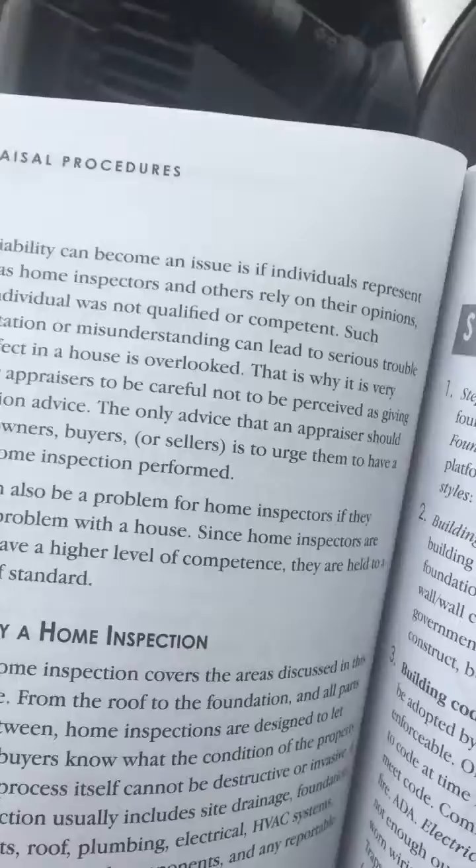Basic appraisal procedures, page 212.

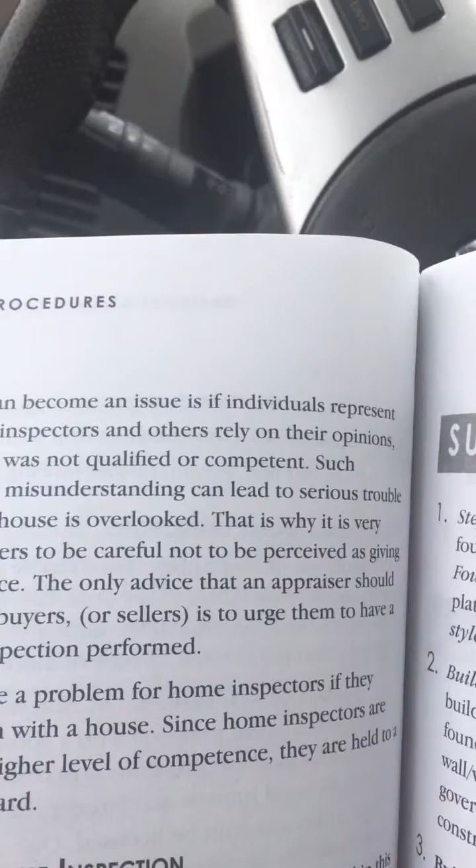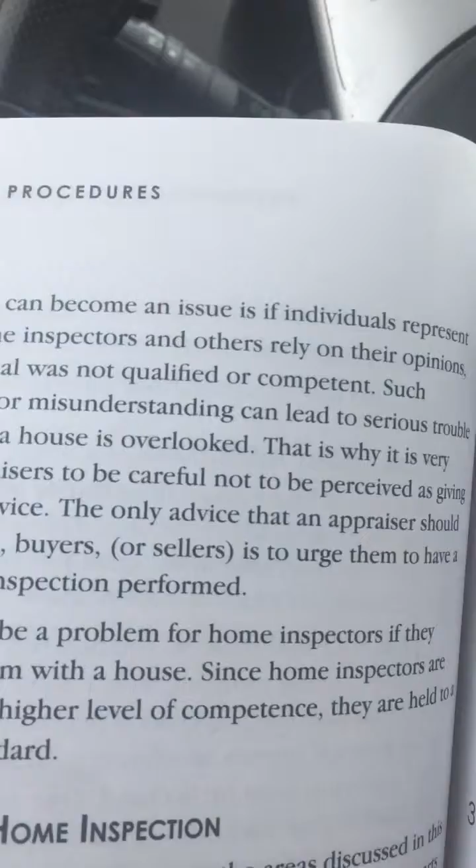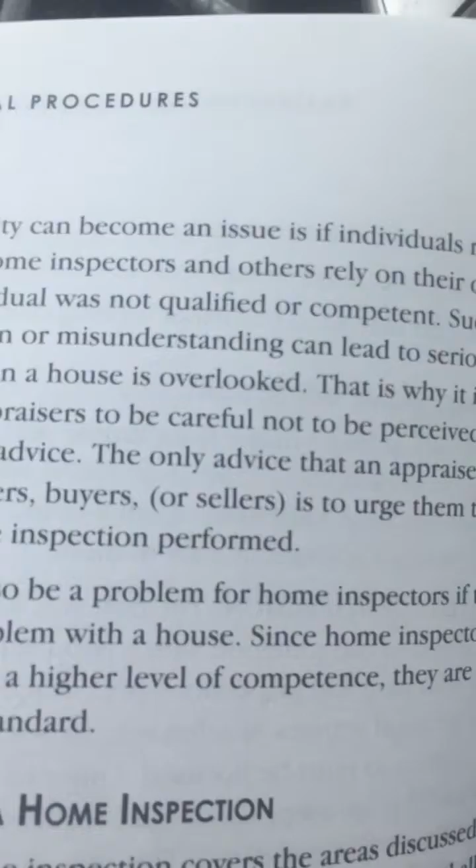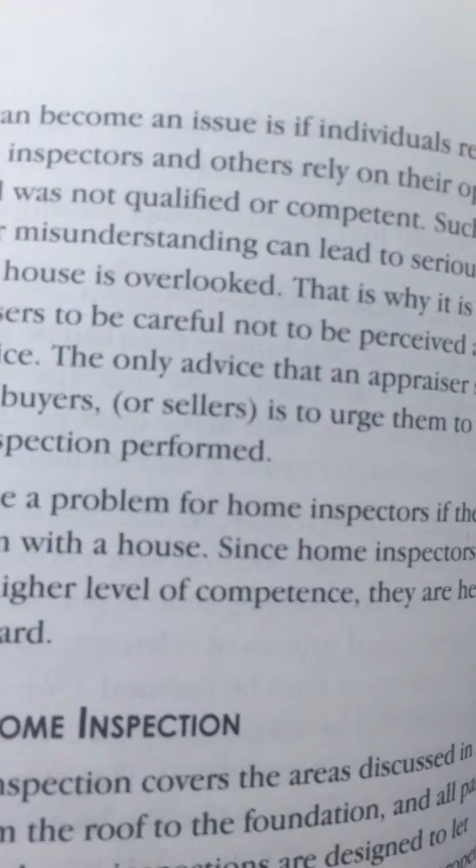Liability can become an issue for individuals who represent themselves as home inspectors when others rely on their opinions, and that individual was not qualified or competent. Such misrepresentation or misunderstanding can lead to serious trouble if a major defect in a house is overlooked. That is why it is important for appraisers to be careful not to be perceived as giving home inspection advice. The only advice an appraiser should give to homeowners, buyers, or sellers is to urge them to have a professional home inspection performed.

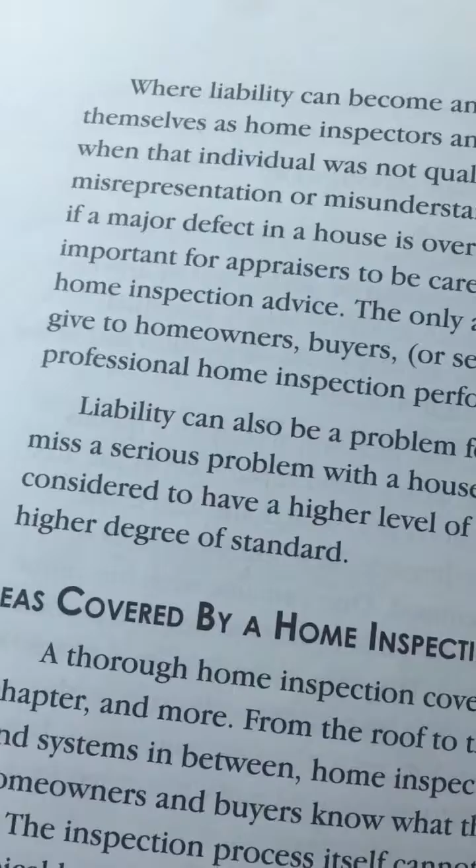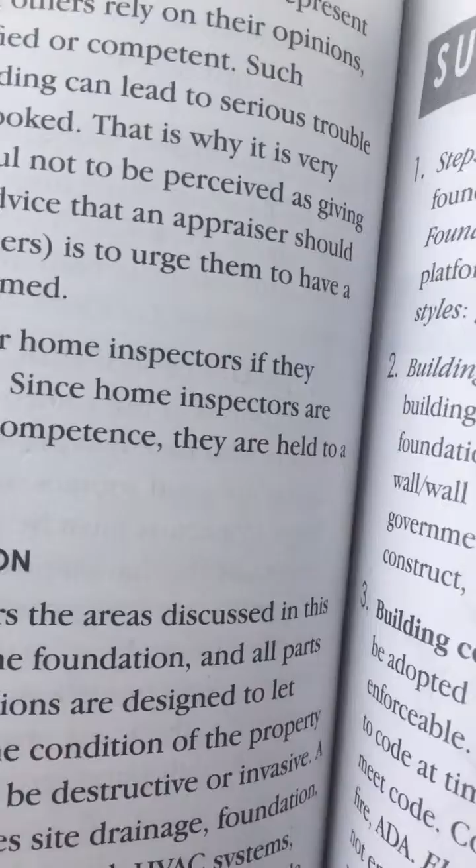Liability can be a problem for home inspectors if they miss a serious problem with the house. Since home inspectors are considered to have a higher level of competence, they are held to a higher standard. Areas covered by a home inspection.

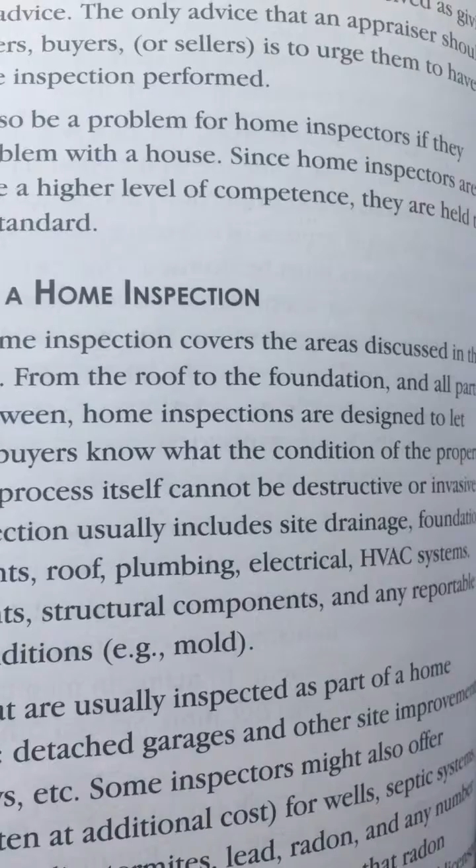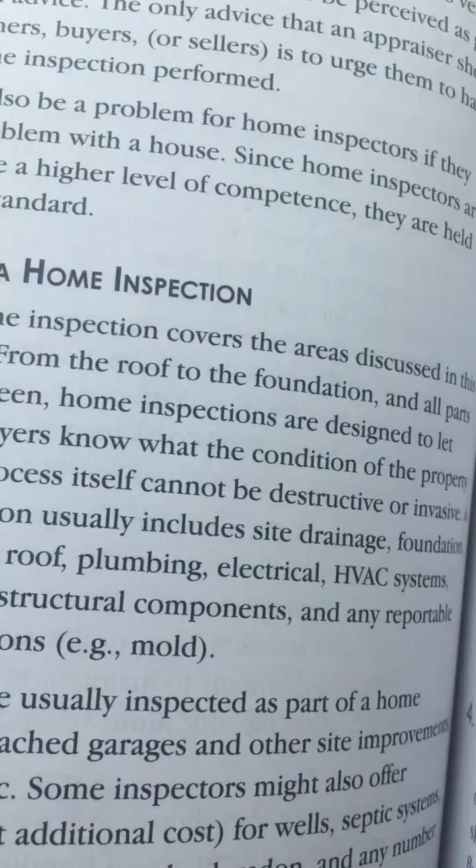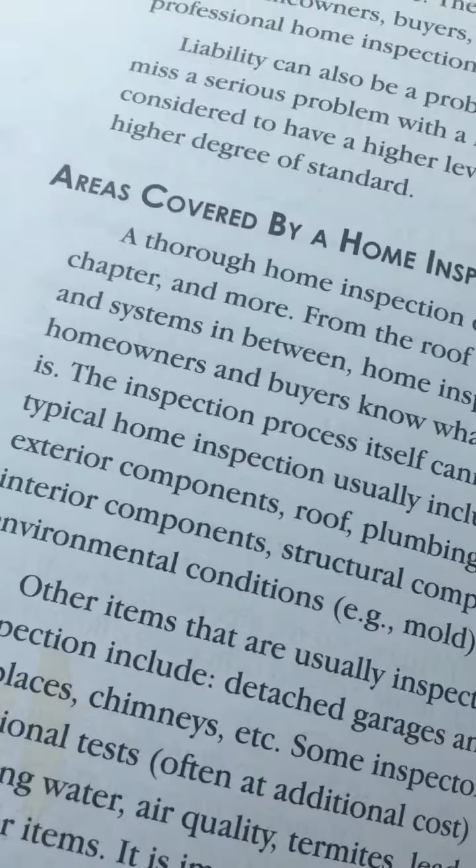A thorough home inspection covers the areas discussed in this chapter and more, from the roof to the foundation, and all parts and systems in between. Home inspections are designed to let homeowners and buyers know what the condition of the property is. The inspection process itself cannot be destructive or invasive.

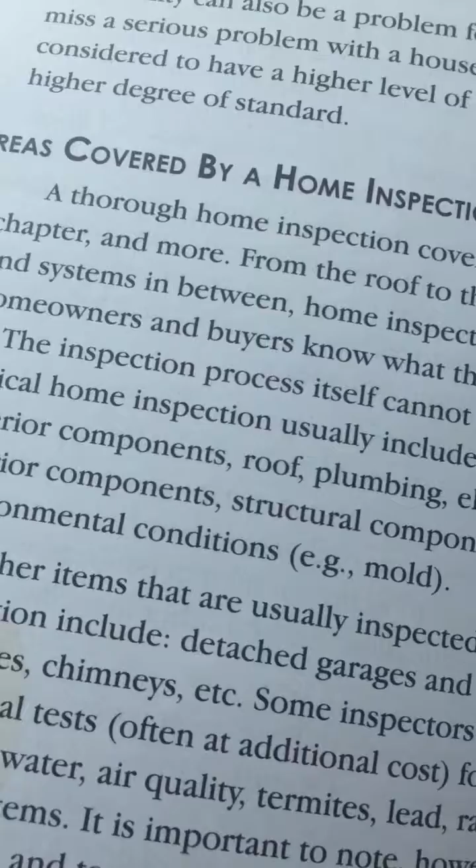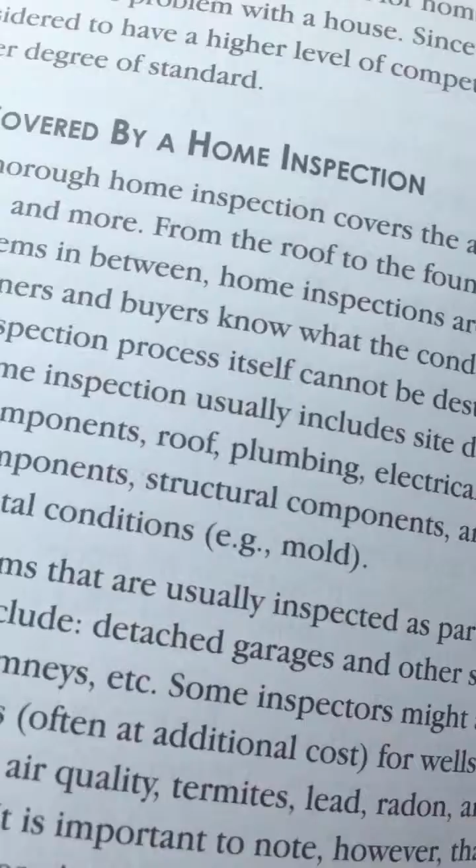A typical home inspection usually includes site drainage, foundation, exterior components, roof, plumbing, electrical, HVAC systems, interior components, structural components, and any reportable environmental conditions, for instance, mold.

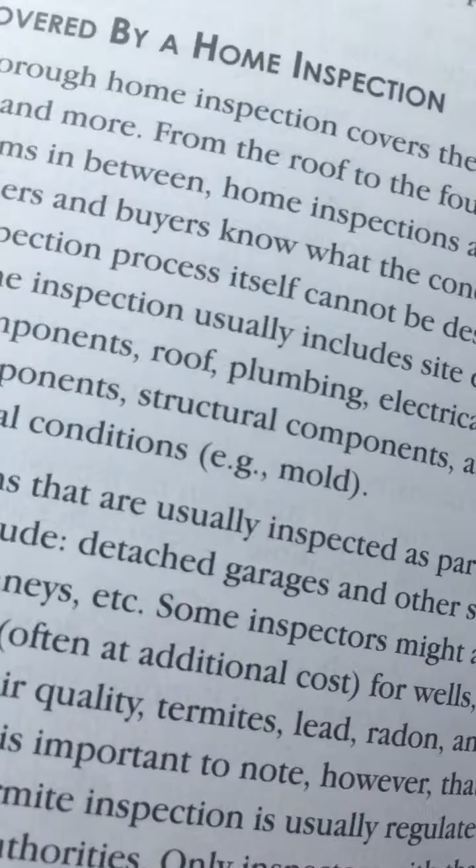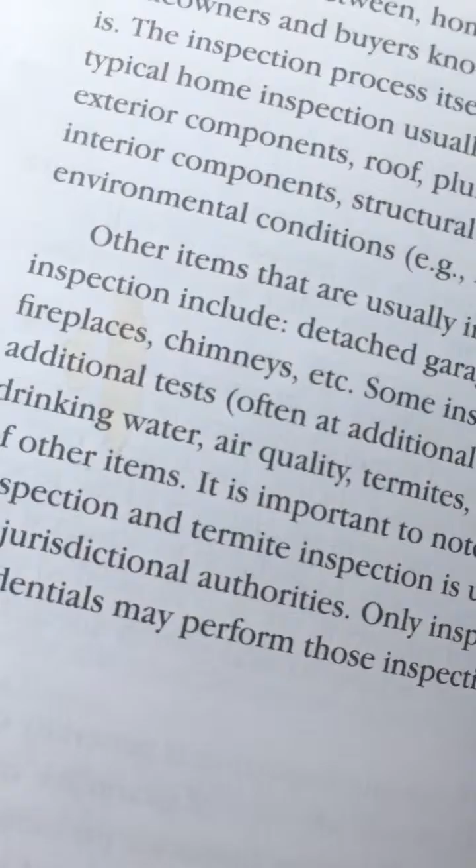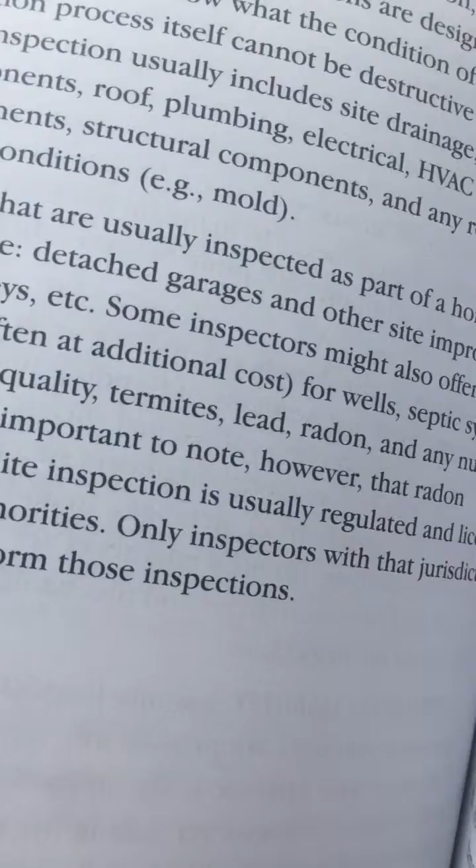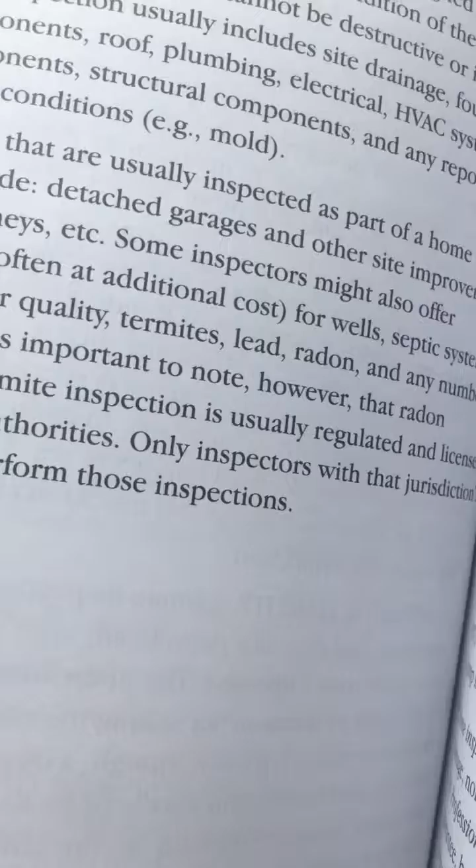Other items usually inspected as part of a home inspection include detached garages and other site improvements, fireplaces, chimneys, etc. Some inspectors might also offer additional tests, often at additional cost, for wells, septic systems, drinking water, air quality, termites, lead, radon, and any number of other items.

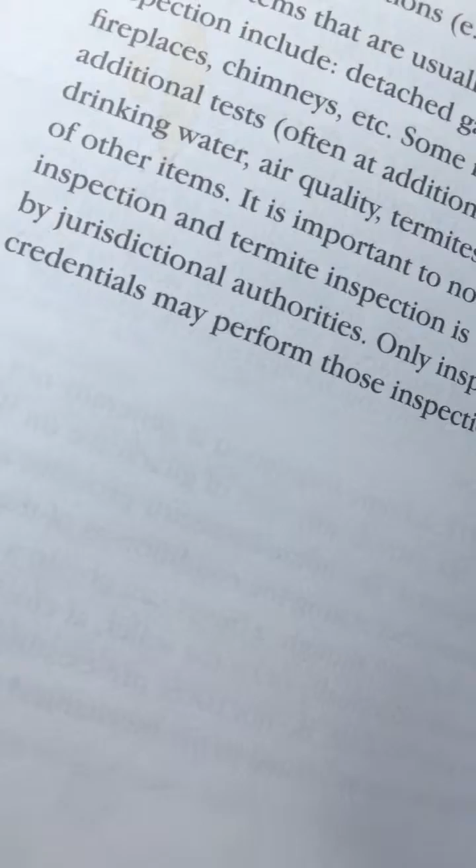It is important to note, however, that radon inspection and termite inspection are usually regulated and licensed by jurisdictional authorities. Only inspectors with that jurisdiction's credentials may perform those inspections.

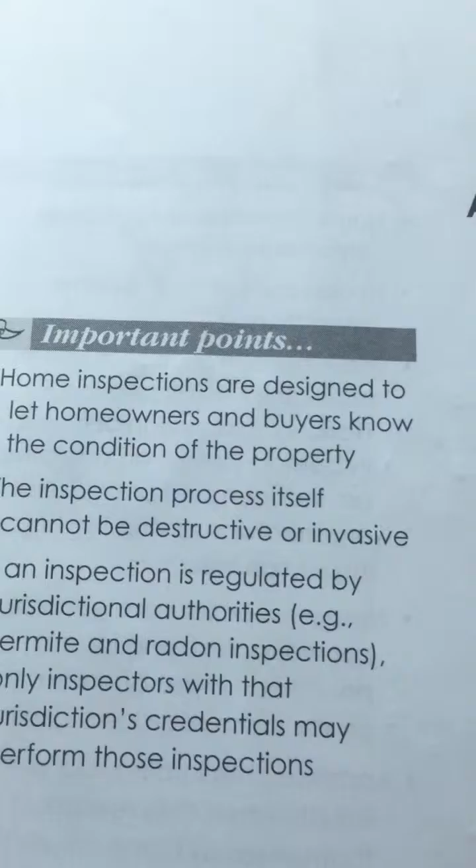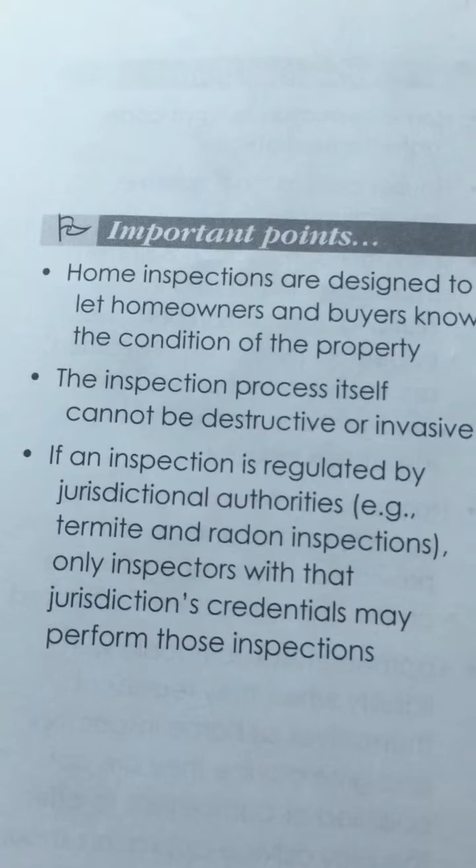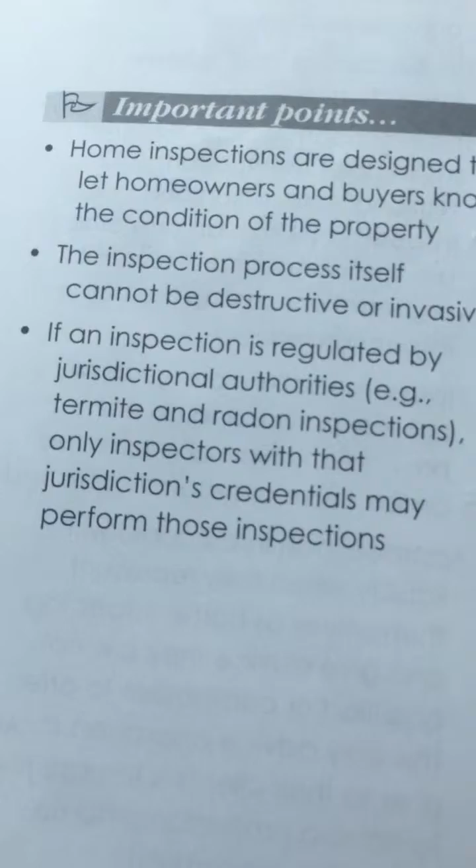Important points: Home inspections are designed to let homeowners and buyers know the condition of the property. The inspection process itself cannot be destructive or invasive. If an inspection is regulated by jurisdictional authorities, for instance, termite and radon inspections, only inspectors with that jurisdiction's credentials may perform those inspections.

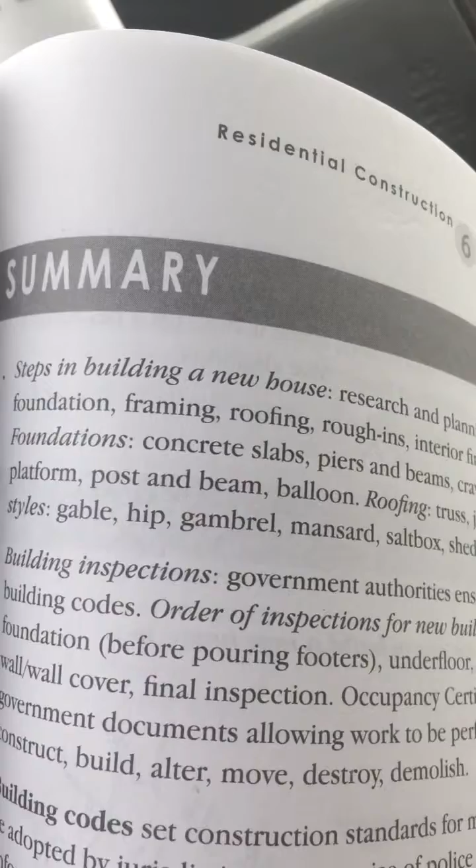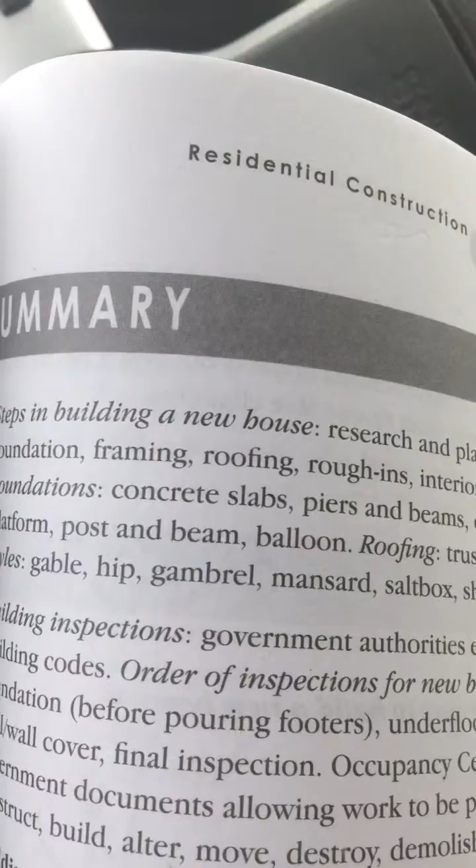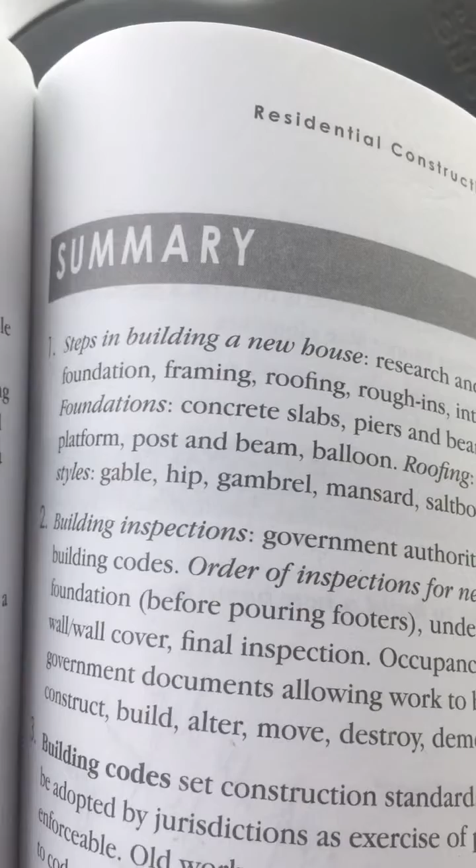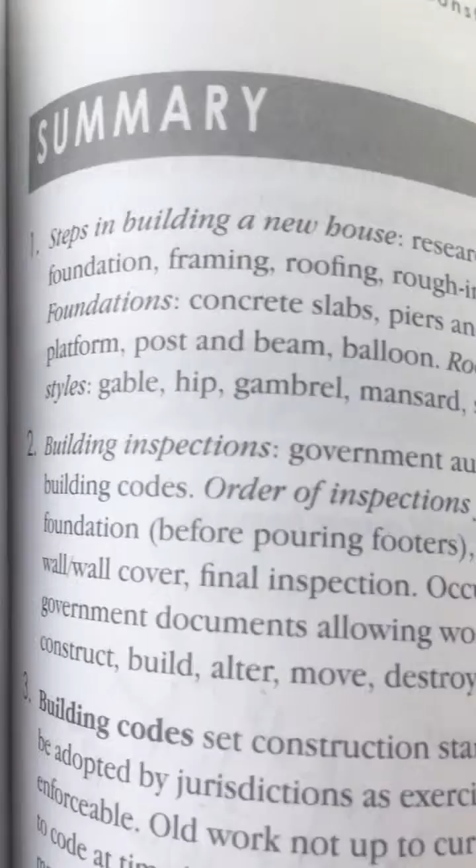Summary. Steps in building a new house: research and planning, pre-construction, site work, foundation, framing, roofing, rough-ins, interior finish, exterior finish, and completion. Foundations: concrete slabs, piers and beams, crawl spaces or basements. Framing: platform, post and beam, balloon. Roofing: truss, joist and rafters, sloped joist. Roof styles: gable, hip, gambrel, mansard, salt box, shed, flat.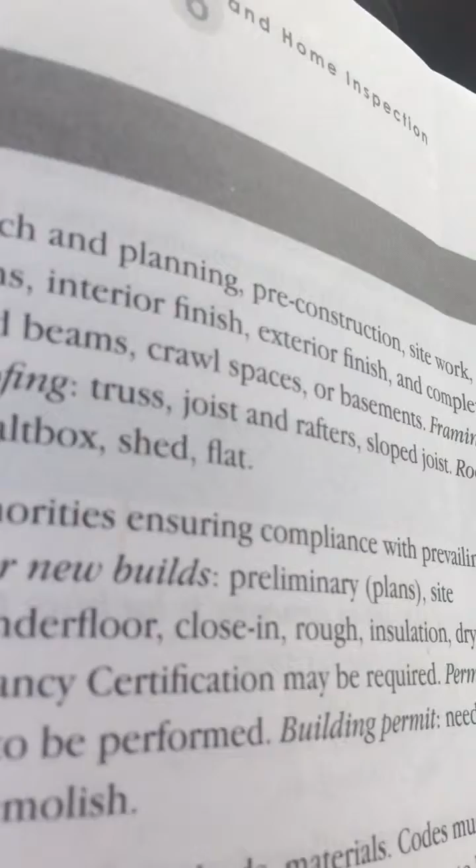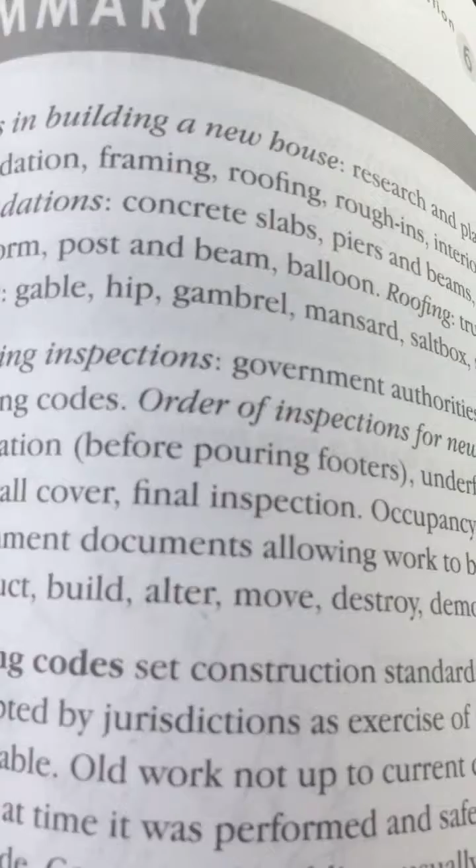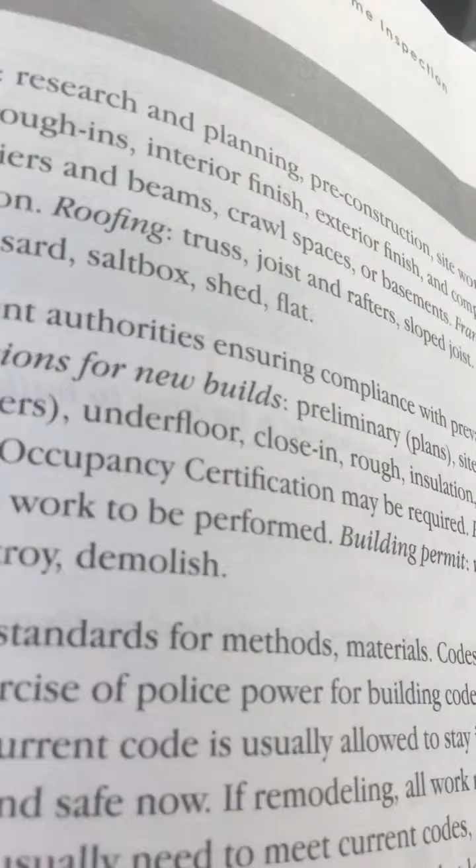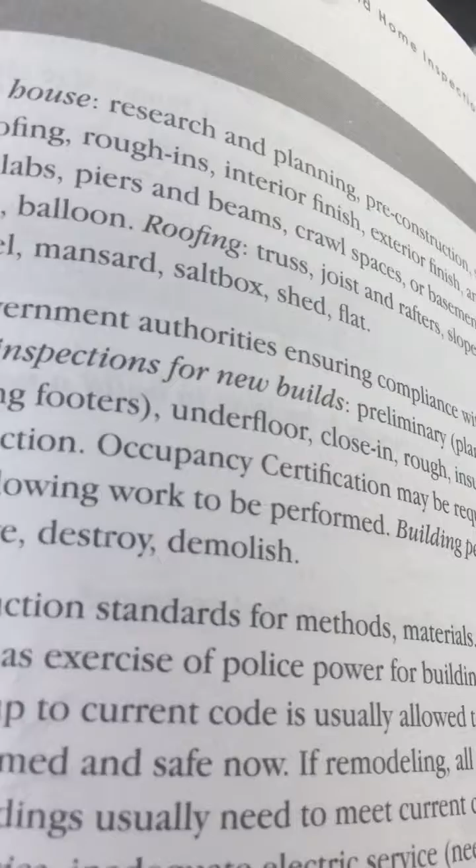Building inspections: government authorities ensuring compliance with prevailing building codes. Order of inspections for new builds: preliminary, plans, site foundation before pouring footers, underfloor, close in, rough, insulation, drywall, wall cover, final inspection. Occupancy certification may be required.

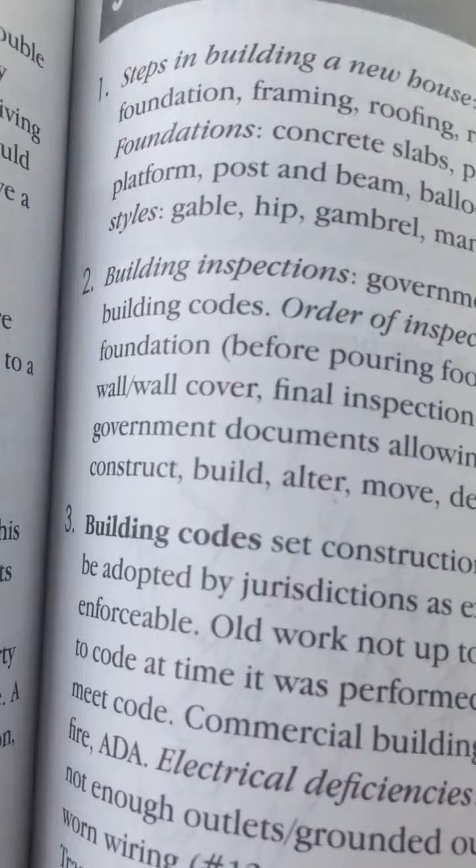Permits are government documents allowing work to be performed. A building permit is needed to construct, build, alter, move, destroy, or demolish.

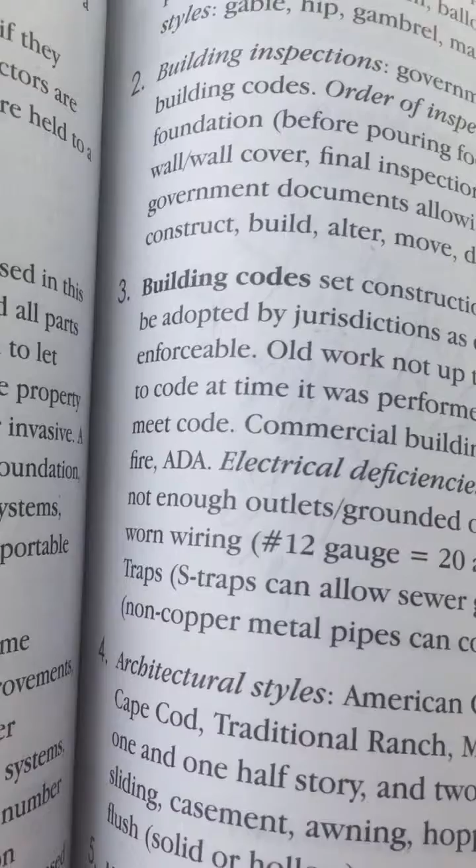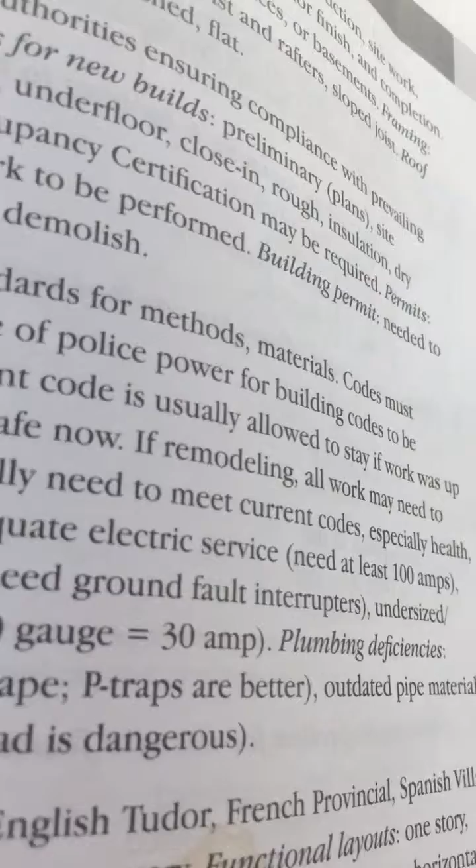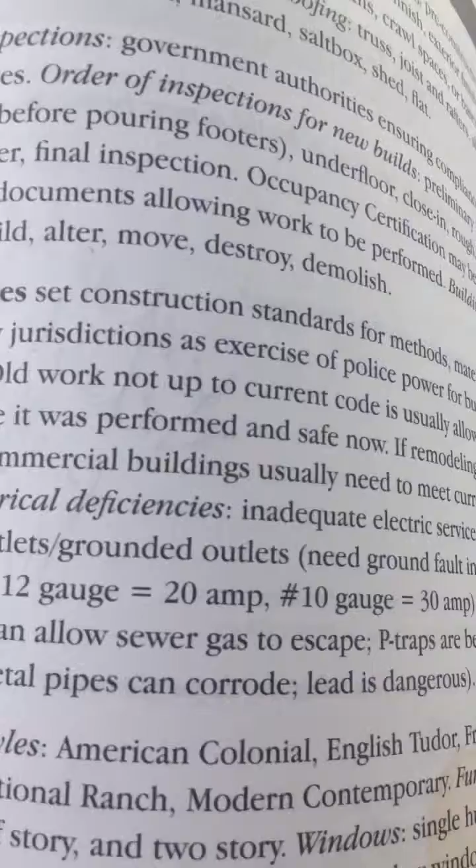Building codes set construction standards for methods and materials. Codes must be adopted by jurisdictions as an exercise of police power for building codes to be enforceable. Old work not up to current code is usually allowed to stay if the work was up to code at the time it was performed and is safe now.

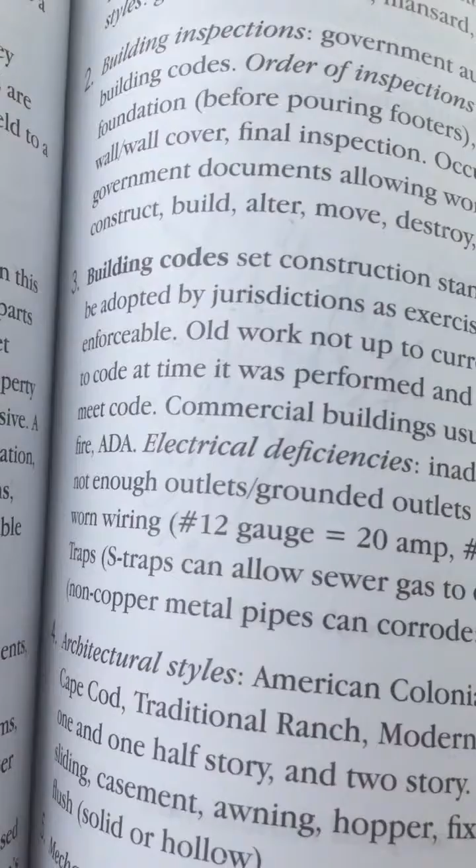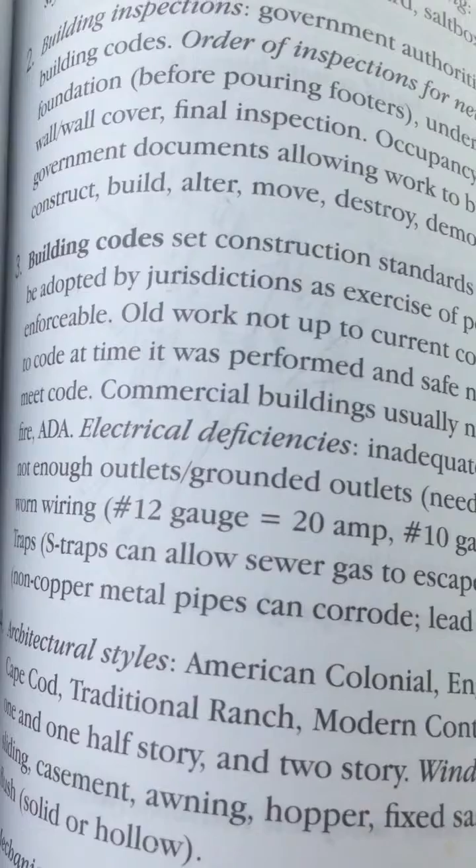If remodeling, all work may need to meet code. Commercial buildings usually need to meet current codes, especially health, fire, and ADA. Electrical deficiencies: inadequate electric service needs at least 100 amps.

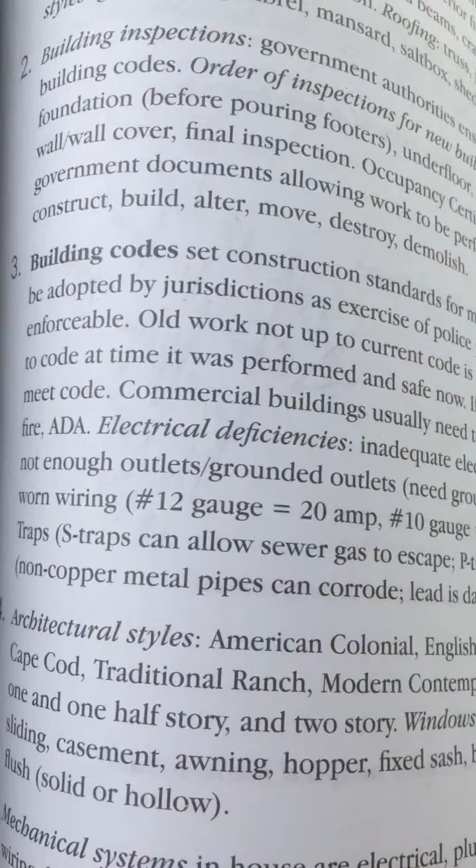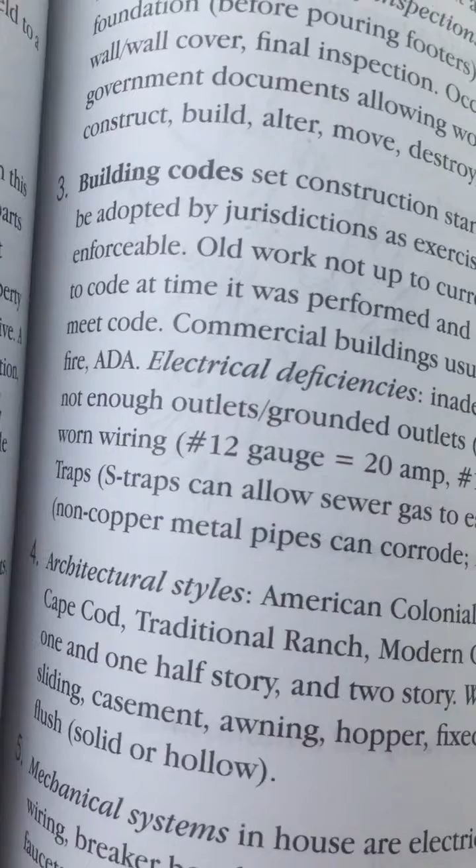Not enough outlets or grounded outlets. Need ground fault interrupters. Undersized, worn wiring. Number 12 gauge equals 20 amp. Number 10 gauge equals 30 amp.

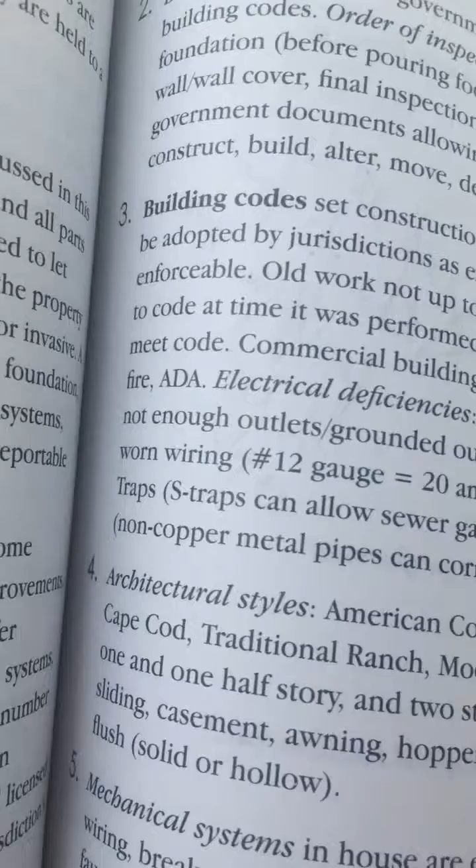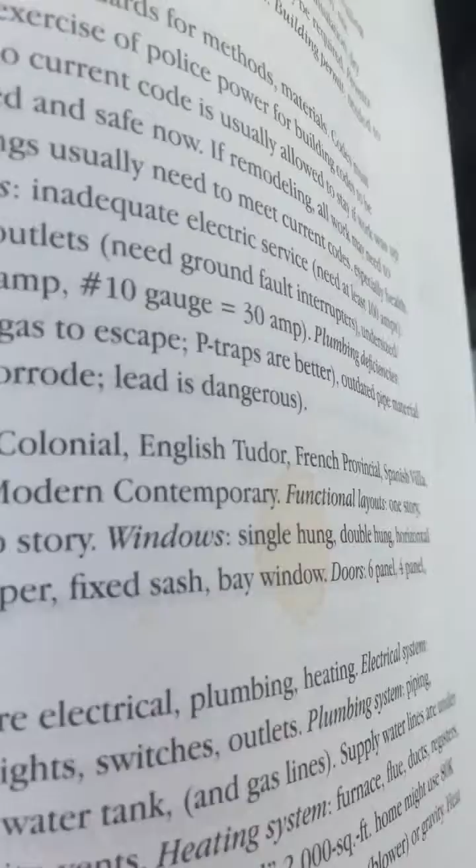Plumbing deficiencies. Traps: an S-trap can allow sewer gas to escape; P-traps are better. Outdated pipe material: non-copper metal pipes can corrode. Lead is dangerous.

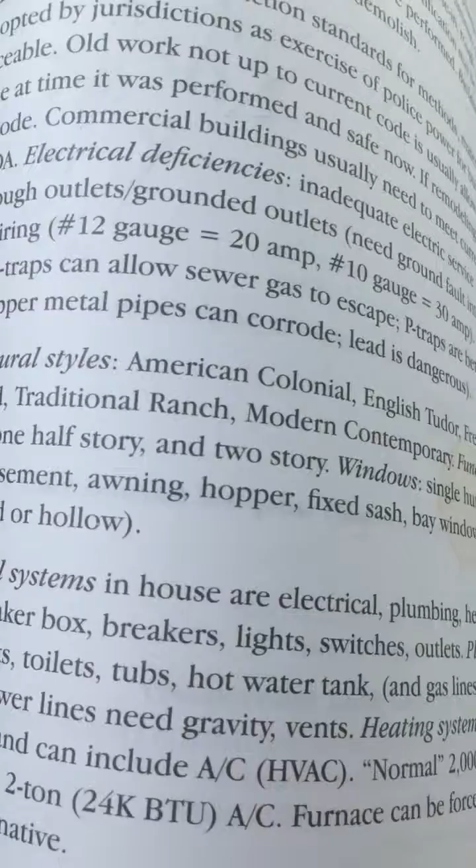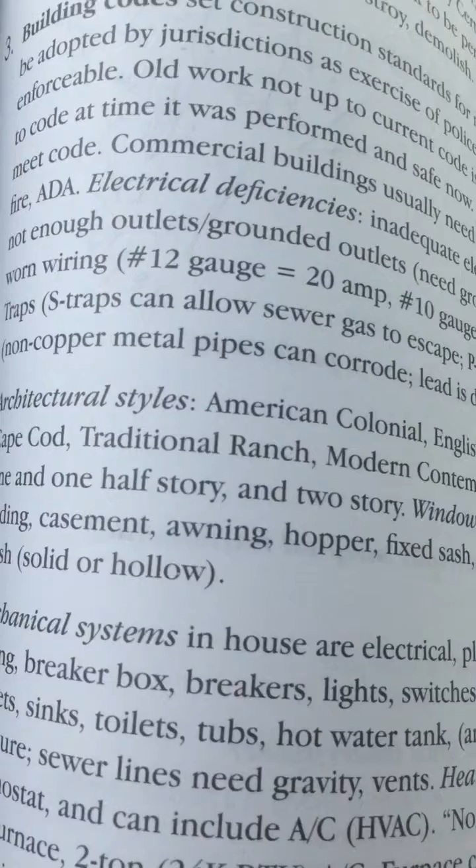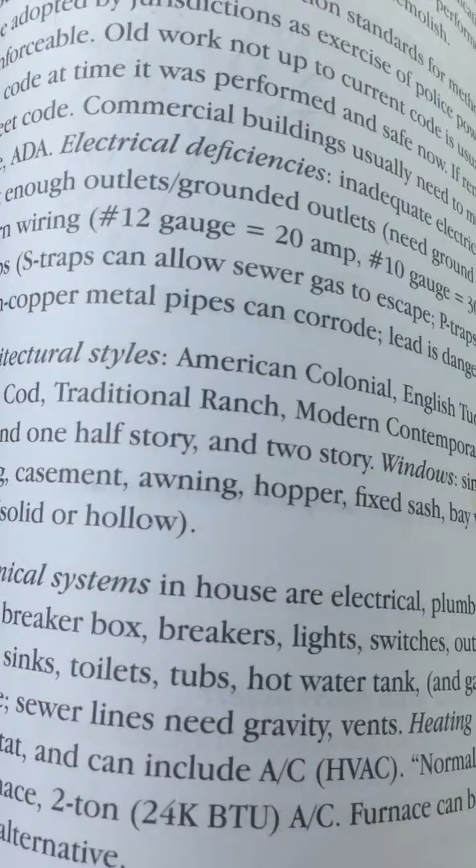Architectural styles: American colonial, English Tudor, French Provincial, Spanish Villa, Cape Cod, traditional ranch, modern contemporary. Functional layouts: 1 story, 1 and 1/2 story, and 2 story.

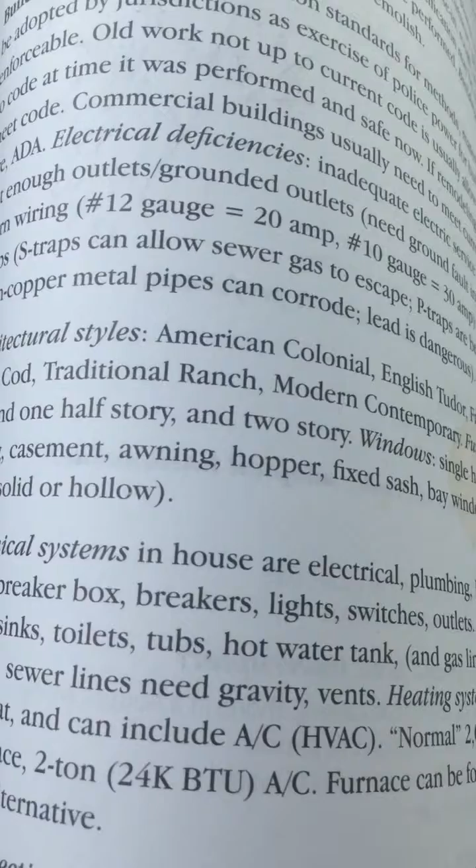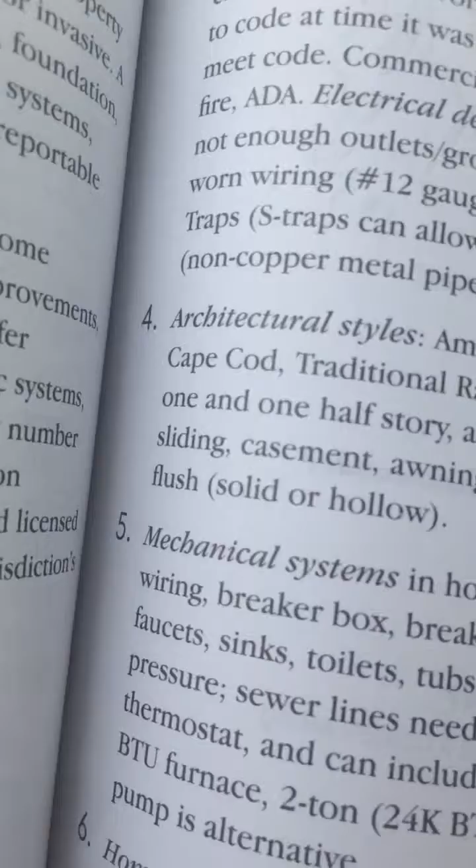Windows: single hung, double hung, horizontal sliding, casement, awning, hopper, fixed sash, bay window. Doors: 6 panel, 4 panel, flush, solid or hollow.

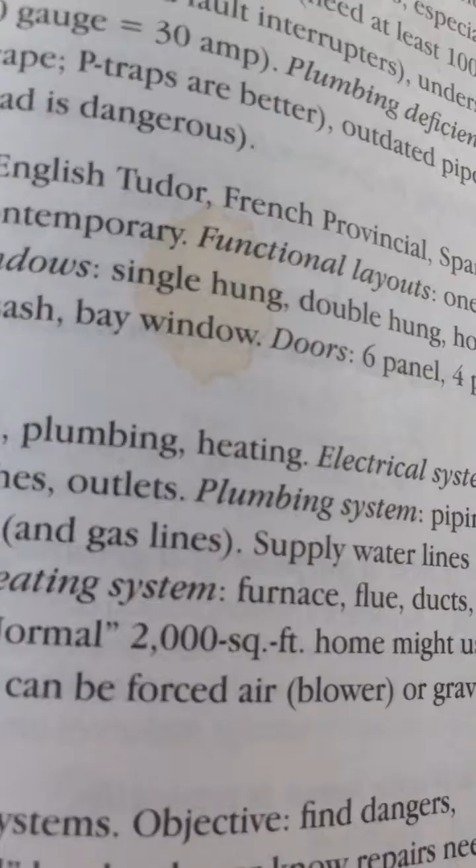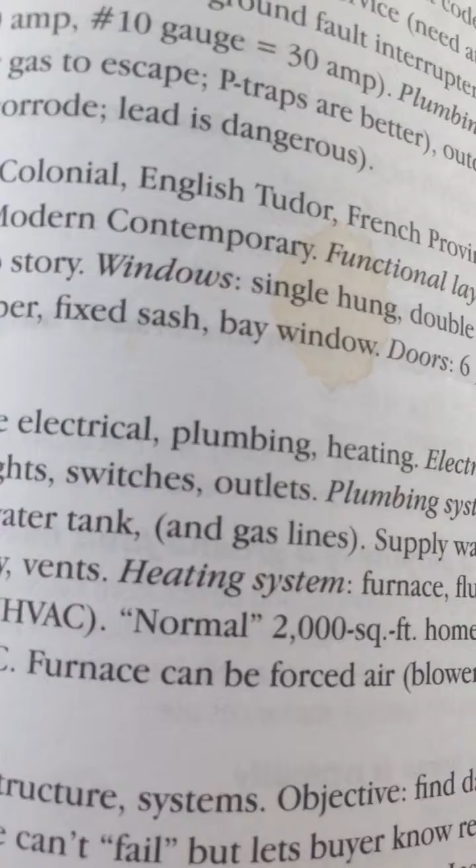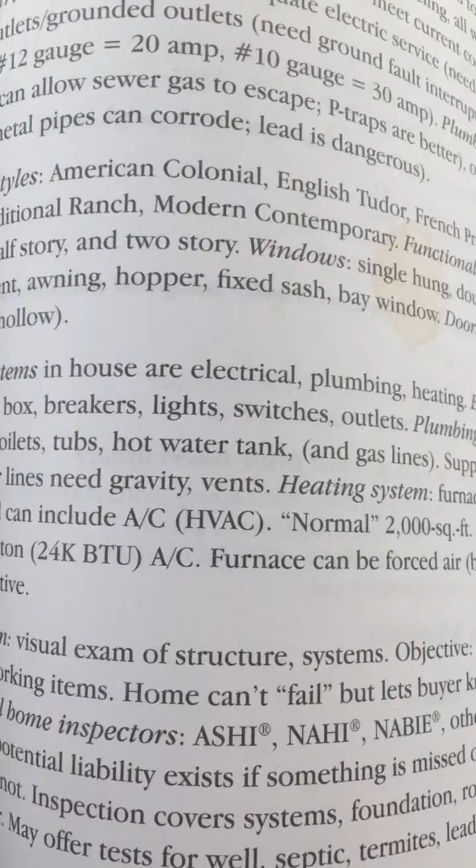Mechanical systems in a house are electrical, plumbing, heating. Electrical system: wiring, breaker box, breakers, lights, switches, outlets. Plumbing system: piping, faucets, sinks, toilets, tubs, hot water tank, and gas lines.

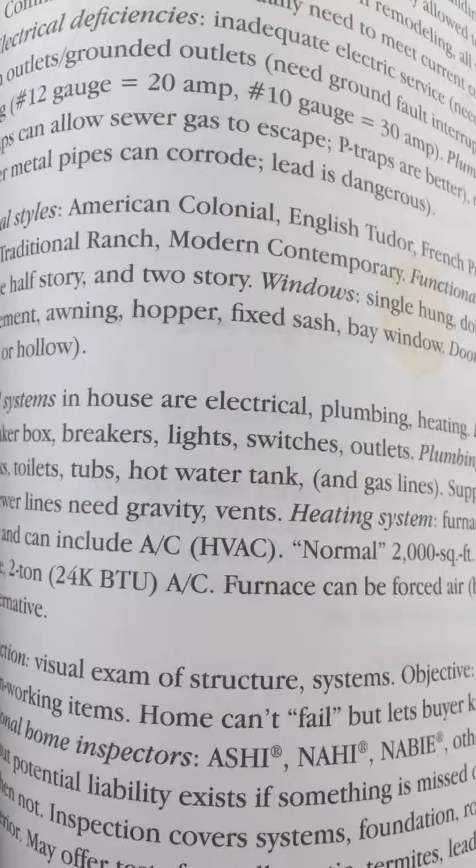Supply water lines are under pressure. Sewer lines need gravity. Vents. Heating system: furnace, flue, ducts, registers, thermostat, and can include AC HVAC.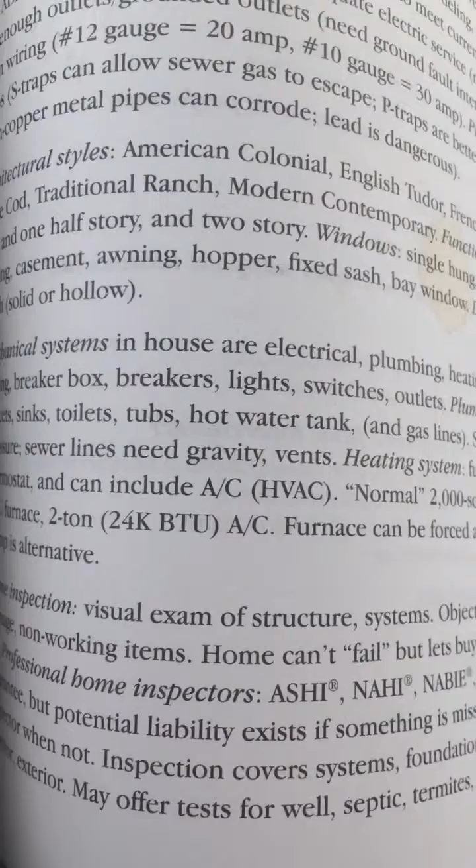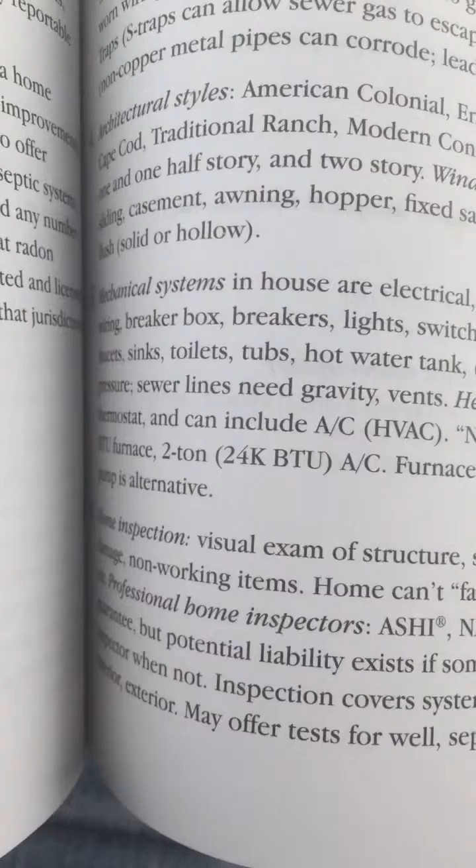A normal 2,000 square foot home might use an 80,000 BTU furnace, 2-ton 24K BTU AC. Furnace can be forced air, blower, or gravity. Heat pump is an alternative.

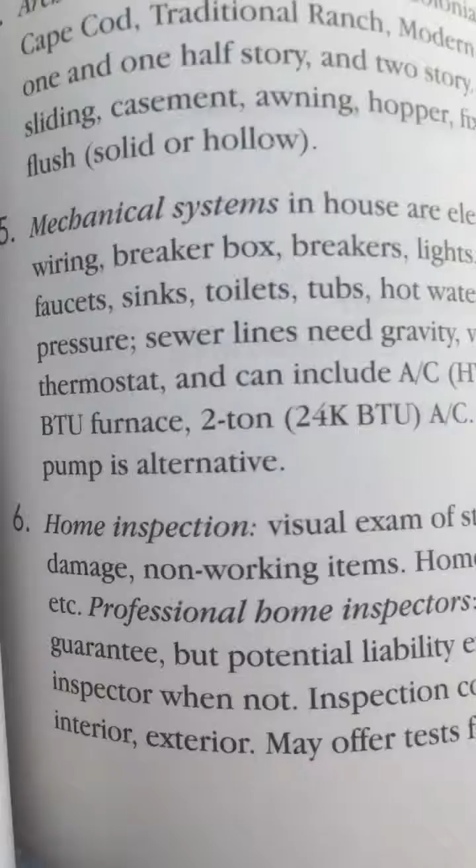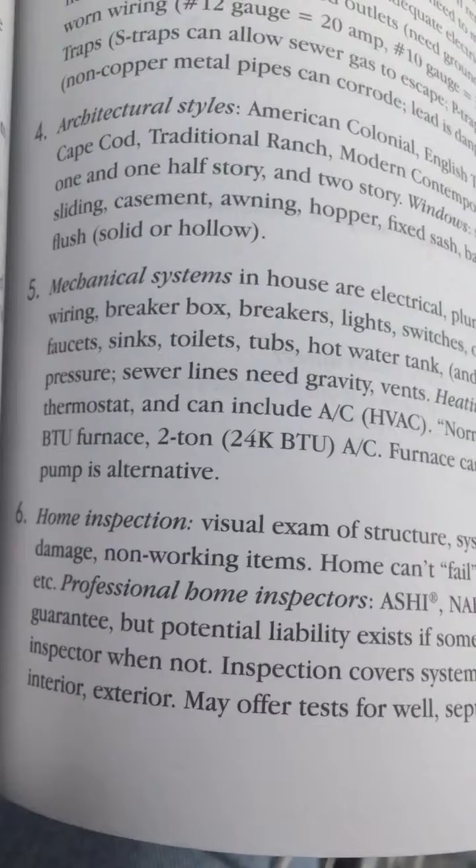Home inspection: visual exam of structure and systems, objective. Find dangers, damage, non-working items. The home can't fail, but it lets the buyer know repairs needed, etc.

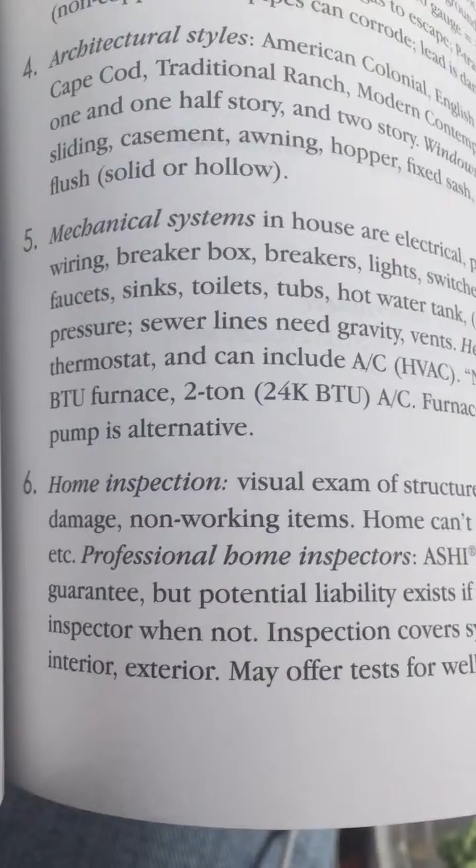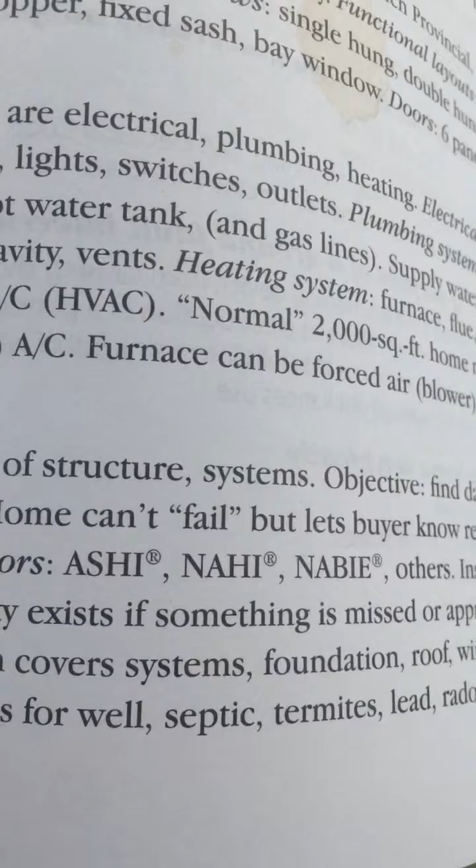Professional home inspectors: ASHI, NAHI, NABIE, and others.

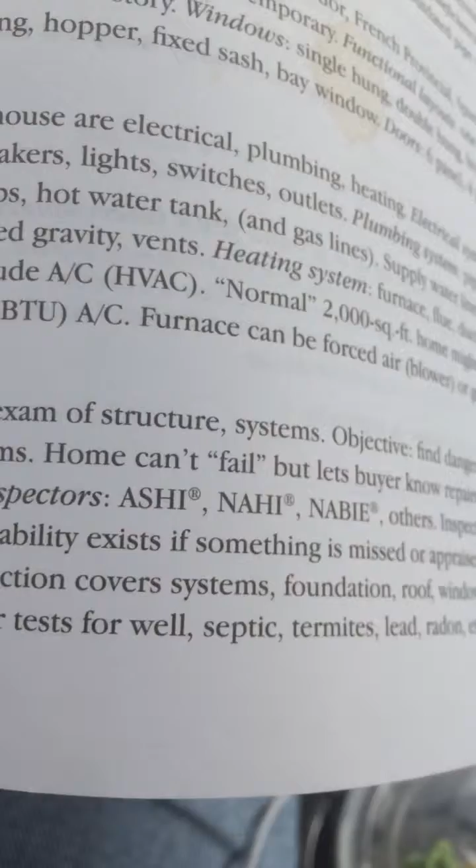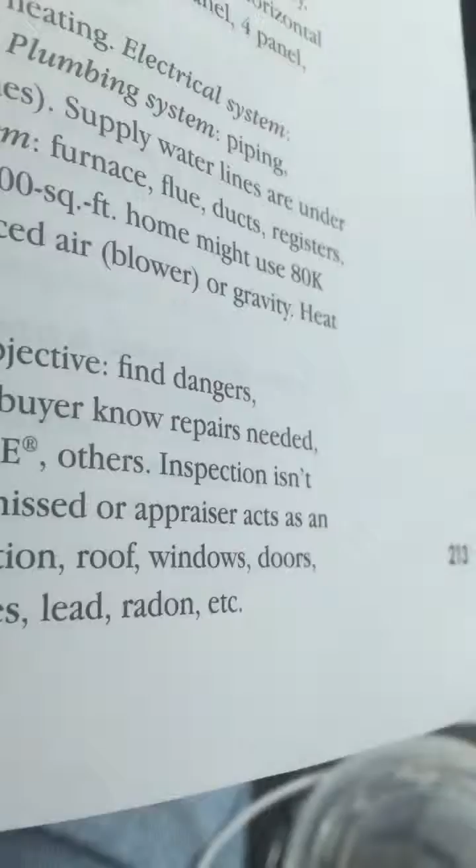Inspection isn't guaranteed, but potential liability exists if something is missed, or if an appraiser acts as an inspector when not qualified to do so. Inspection covers systems, foundation, roof, windows, doors, interior, exterior. May offer tests for well, septic, termites, lead, radon, etc.